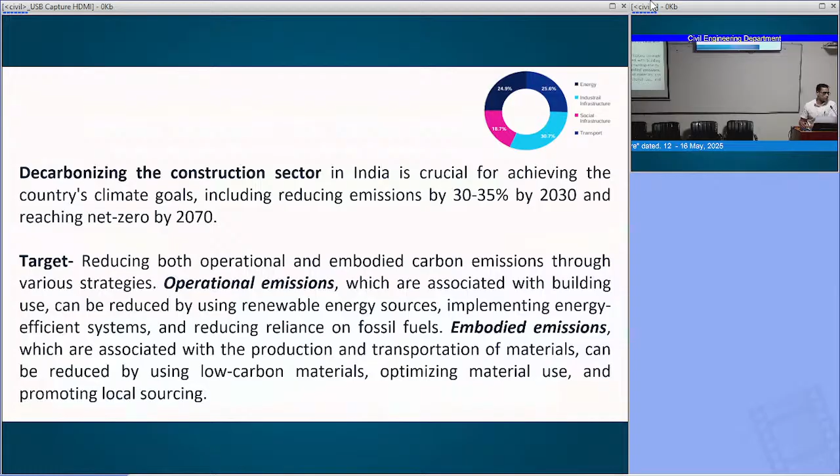I hope all of you are aware about NIRF ranking. In ranking now, this term is coming up in a bigger way, where you are going to get marks for that, and that is how probably we need to focus more on the operational emissions, how we can control it. Then at the end you come to the embodied emissions, which the earlier speaker also talked about, how much energy is required for manufacturing a particular product.

Now when you look at operational energy, I hope some of you are aware of what this current government is doing in India. Let us talk about how we can reduce the demand for energy, or control the demand for energy based on conventional sources. Primarily one option is obviously to go for renewable energy, and we know what kind of economic model this government is setting for all of us.

If it is at the domestic level, there are certain different norms; if it is at the industrial level, there are different norms. But primarily right now, if you want solar energy in your home, the government is giving some kind of incentives, subsidies exactly. So this is not something very different which we should only learn from developed nations; in our country too we have set some very good examples which can be put forward, and then we can really understand it.

Now again the question arises, because we are working on whole life cycle assessment: what is the end of life of a solar PV? And then at the end of the solar PV, where does that material go? If you have seen solar PV panels, there is an aluminum frame, then you have some material like silicon based material which primarily generates energy, and if it is getting stored, you are using some batteries as well.

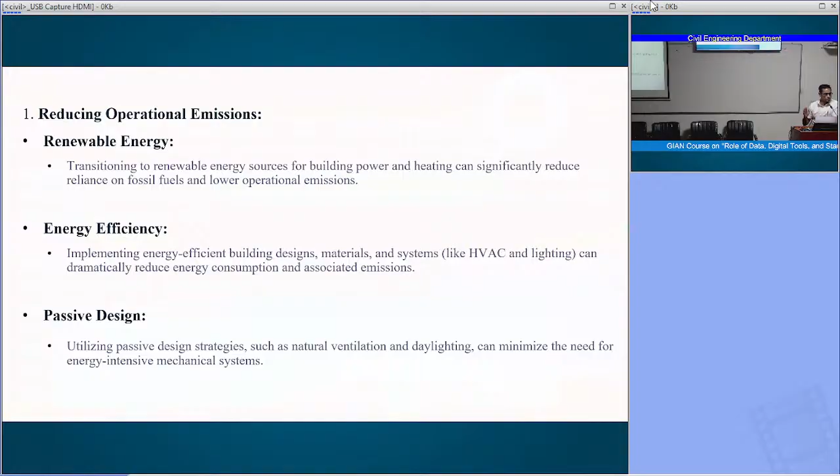Coming back to the second phase, which was asking about embodied emissions - in case of embodied energy, this is the area where my entire group and all of us are working together, which normally talks about low carbon materials.

I'll just simply read the basics where we talk about sustainable wood, where sir has also said in developed nations like the US, they use a lot of wood. Then you talk about utilization of recycled steel.

So normally the cut pieces which are removed from my side are normally sold or given back to the industries, and they do re-rolling of the steel, and that steel can be reused again on my side. Nowadays we are all hearing a lot about LC3, where you require less amount of energy for production of cement.

That is one of the areas where you talk about alternate cement formulations. We are working now, selling a concept, where we manufacture concrete with zero cement, zero sand, no water for curing, gaining 100% strength in 7 days. People are cracking their heads day in and day out in this domain, and we hope they will come up with their own philosophy. We are commercializing one such technology in the local region of Nagpur. This is how it goes for alternates of cement, which is primarily required for carbon footprint reduction.

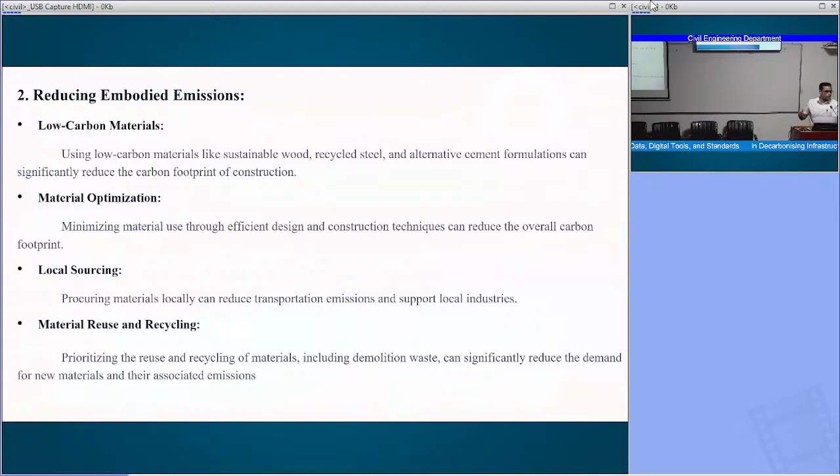This is what the Indian market needs. Before we go for the legal aspect, we need to have this particular angle before giving the final verdict stating that we can demolish a structure or not.

More on the policy terms, still in India, if you are involved in a larger construction, having ratings for my projects is still at a nascent stage. It is not mandatory, it is a voluntary approach. Some municipal authorities have made it a mandate, but there are very few examples. If you see any growing class 2 city, or talk about metro regions, there are only a few key players who are keen for this type of green certification, like star ratings and all.

And I'll show you some examples of how this benefits the end community who is executing. You can tell me, so many of you are on campuses, is there any structure which is rated as star rated? For your Hyderabad campus, what I know is, for NICMAR Hyderabad campus recently they got IGBC rating, and Pune also. Good.

So this is how it goes, where essentially we need to focus more on policy. What kind of support which I can get from the government, that can also be checked. And this is more important, where we need to work together, as Anil sir is also saying, at the end we need to come up with some document, if not now, maybe down the line two, three, four years or months, where all of you can give your inputs, either for material, energy or water. State what kind of policy formulations has to be there, that this particular clause is essentially required. That is how a policy document can come up for the builders.

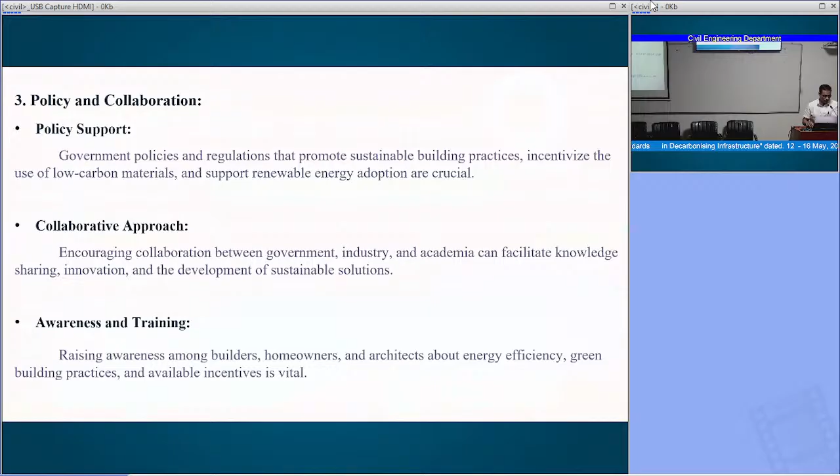This is more important, where you talk about the developing era. If we can focus more on technology and innovation, where everything can be controlled within my factory, and on site whatever we are doing, probably less intervention of any of those resources what we exploit or which do not have any benchmarking. So you have a lot of digital technologies.

I hope most cities now have metro, right? And in every metro you must have seen there are pillar numbers. Behind the pillar number, the story is inside that pillar, what it has, that is being recorded somewhere. That is how the story goes, and that is the whole idea of introducing BIM, where you are systematically putting up the data of a particular structure, what you are constructing for the community.

And then also there are better ways, what is being mentioned as prefabrication or volumetric or 3D printing and so on and so forth. Those are all the multiple areas where you try to focus on how these emerging technologies can help our particular entire construction industry where you control your emissions.

Data driven approach, we need to generate the data for our country. That is again most important. We do not have data. Often we just try to fetch something from the net, and whatever is available we just try to quote that such and such researcher has given, but there are no standards. And then this baseline data generation itself is going to be challenging.

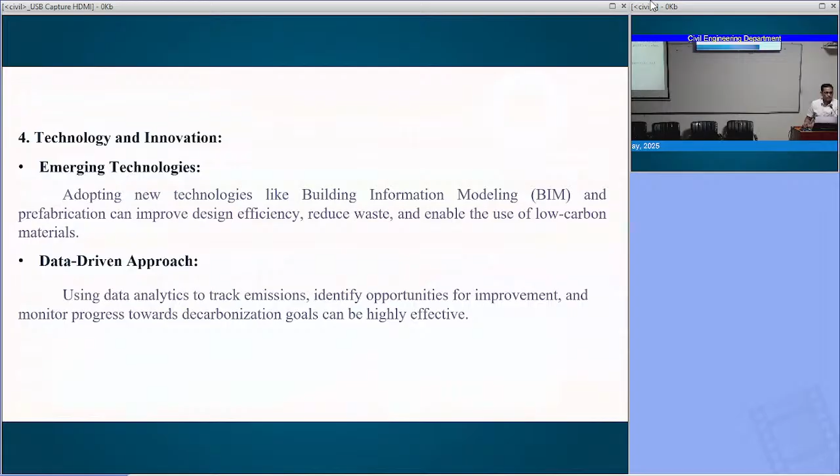For that probably we can take help of our students who can go to the industry, and industries are always reluctant to give the real life data. That is again a challenging part. We have been asking these kind of questions to a lot of industry people, but that's the real fact, where we need to get the real life data in terms of the Indian market. So that is also one primary area, you can say.

However, there are two more additional players in India which primarily focus on sustainability or efficiency. You have the Global Business and Sustainability Initiative, working on decarbonizing sectors like residential. You can browse a bit and get more information from these kinds of agencies.

You also have the Alliance for an Energy Efficient Economy, where they look at the decarbonization roadmap for developing countries like India, and right now they are focusing only on the cement sector. If we say let's stop using cement, it's still weird in the local market.

If I remember correctly, 5 or 10 years back there were guidelines that the production of clay bricks should be stopped immediately, and the Pollution Control Board gave this mandate. However, we still have a very good number of manufacturers existing in the market.

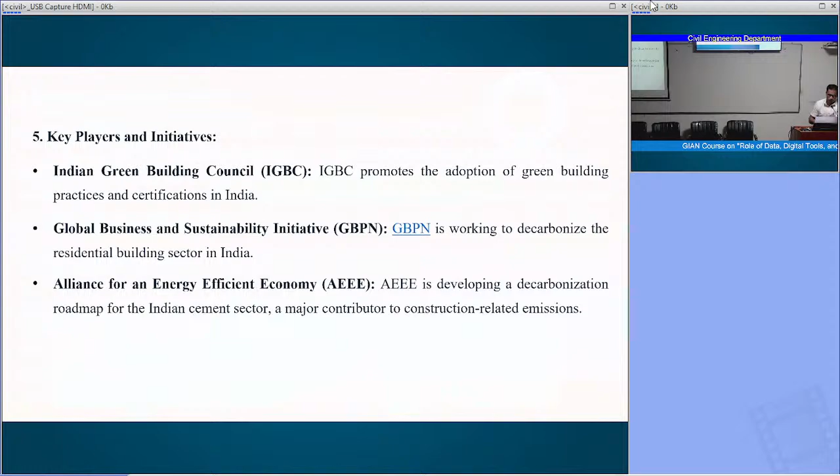So we need to understand this, and probably this is one of the domains where they are focusing more on the cement sector. I should not say much about green building because this is not a new term, it's almost 2 decades old in the Indian market.

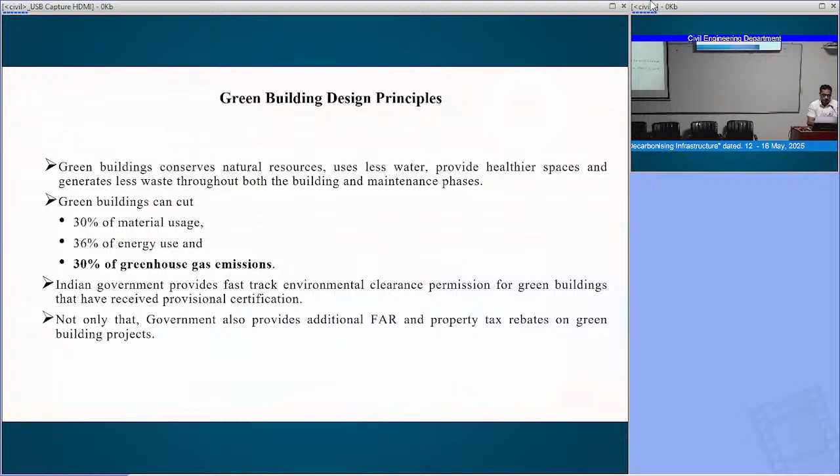But here the goal is about GHG emissions, and as per IGBC standards, if we apply green building design principles, probably you can save at least 30% of your emissions. Now this is how it goes - there are standards, and we need to focus on what kind of benefits or incentives exist.

I spoke earlier about educational institutes. Now let us talk about the private key players for different regions. I have showcased them here - I've Googled a bit, and these are all Indian markets.

So in India, it's not like the government is not active - we do have policies. The only thing is we need to apply it at a larger scale. There are very few examples available in the market currently, in states like Punjab, Rajasthan, West Bengal, UP, Maharashtra, Himachal, and Jharkhand.

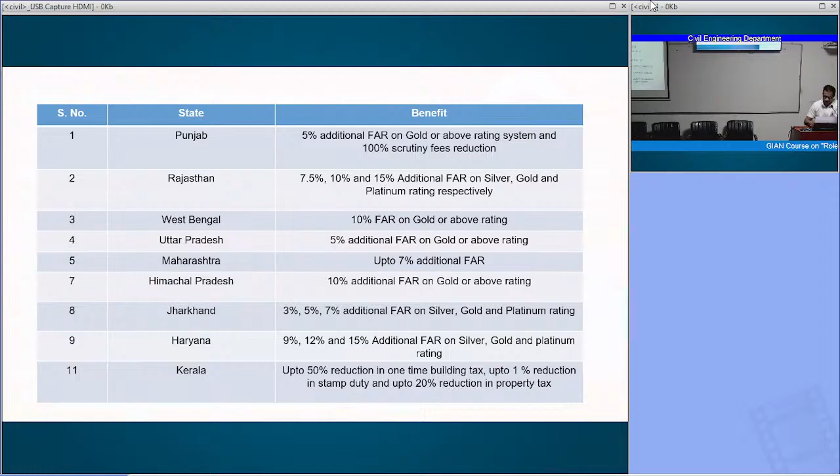Right now, as we are in Maharashtra, you can see up to 7% additional FAR allowed, provided that particular project is one of the best certified or star-rated products from the green building perspective. Let's do one small comparison of where we stand.

I'm not sure if it's visible, but the first 2 or 3 columns talk only about India, India, and India. And now the net zero guidelines exist, which work on the philosophy of decarbonization.

Earlier it was only about efficiency - that's how the jargon evolved. First, when we started working, it was about designing or developing something energy efficient. Then sustainability came into picture. Now we are talking about decarbonization or net zero.

The story remains the same - the holistic idea is that over the last 2 decades, the Government of India has really been trying to push this mission to a larger extent.

And if we see IGBC and GRIHA - GRIHA is still relatively silent, and it's offered for government institutions, with clear intentions. There are certain standards applicable for both existing and newer constructions. So that is how IGBC net zero guidelines work.

At the top, it focuses more on waste rating, energy rating, and water rating. So if we ask any contractors, do you generate waste on site, normally the answer is no. They say, sir, 100% of whatever construction waste or leftover material is there, we use it for backfilling - which is not the real life case.

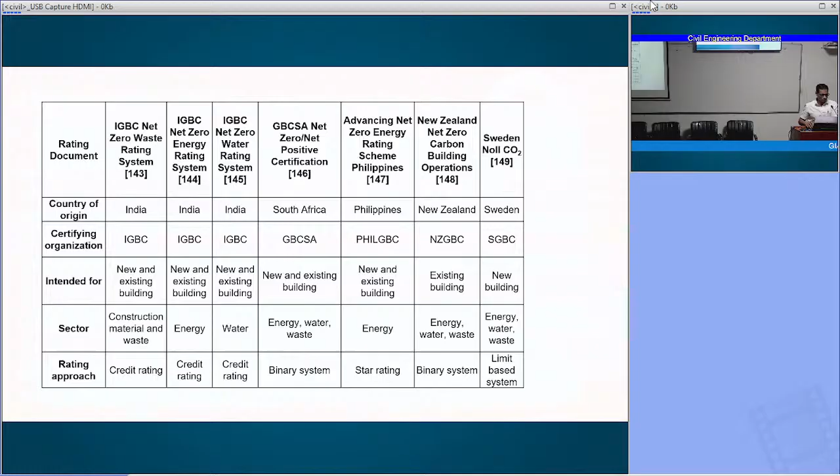This is how they are again talking about net zero and Noll CO2, something like that. Some aspects of the guidelines are by and large repeating, I'll just simply read the bold letters. It talks about energy efficiency, conservation, energy efficient equipment application, then renewable energy harnessing, then you have carbon offsets, which you need to assess using the amount of energy you have, and then you also focus on GHG emission.

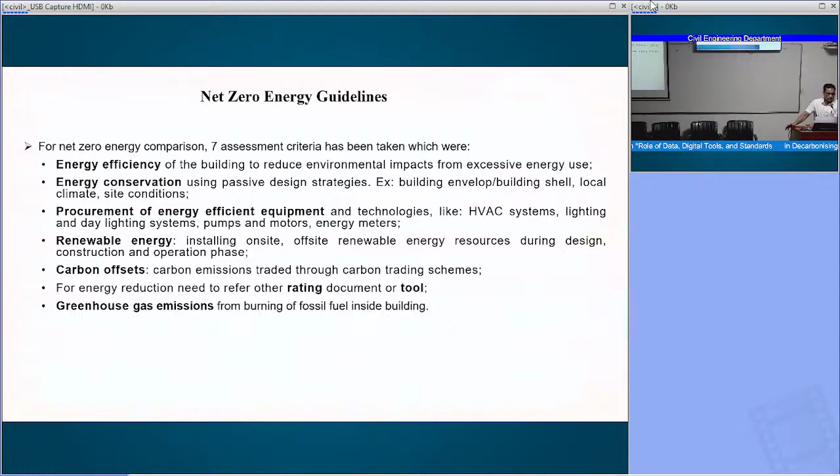We are all using OpenLCA as one of the tools, and a demo will be given by one of the experts, I think day after tomorrow, so the third day. There you will get to know how to input data into the tool, and OpenLCA is free of cost, so any one of you can use it for any particular product, whether for research or a case you are designing or working with.

More on the net zero energy part. Wherever check marks are there, it primarily focuses on the fact that you need energy efficiency, energy conservation, and good procurement control. I do not know how you procure your material requirements, but in government institutions we have a mandate where we go for e-procurement, a digital way of doing business, where you understand that your procurement is efficient and you compare all products on a common line.

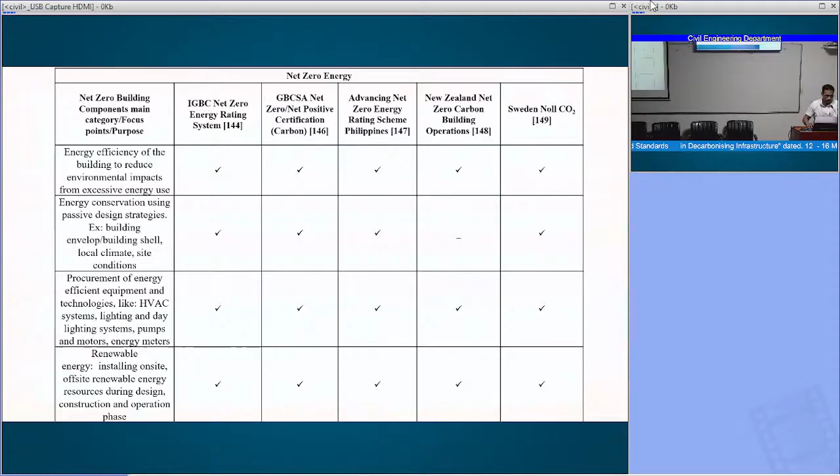And about renewable energy, as we already discussed, they are all available. Also, in most cases in the Indian system, carbon offsetting is still silent. For energy reduction there are no standard guidelines. These are areas where as a researcher our goal is always, can I do something into this, or some of my predecessors or successors can connect and develop good guidelines for them. And GHG emissions are still silent in Indian guidelines as well.

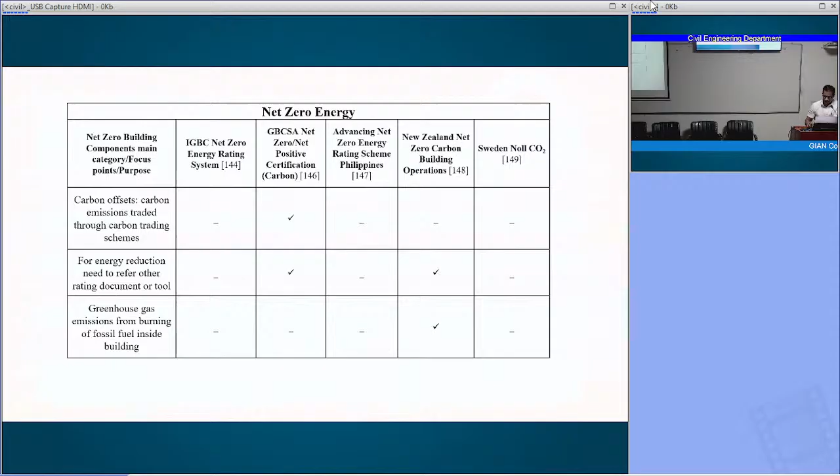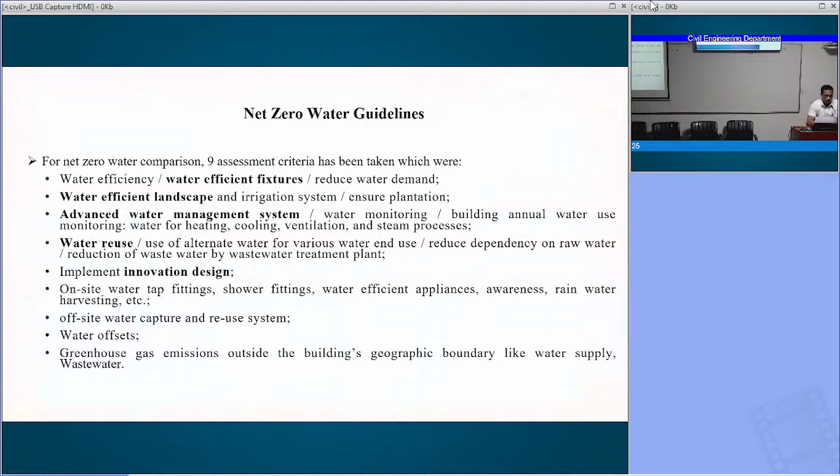Coming back to water efficient guidelines, you talk about water efficient fixtures, water efficient landscaping, and advanced water management systems, using a lot of sensors for agriculture purposes. I hope you know drip irrigation - there are certain sensors which sense the moisture of the soil and accordingly release the amount of water required. This is how the story goes with smart or efficient water usage, and innovative designs are always there for specific applications.

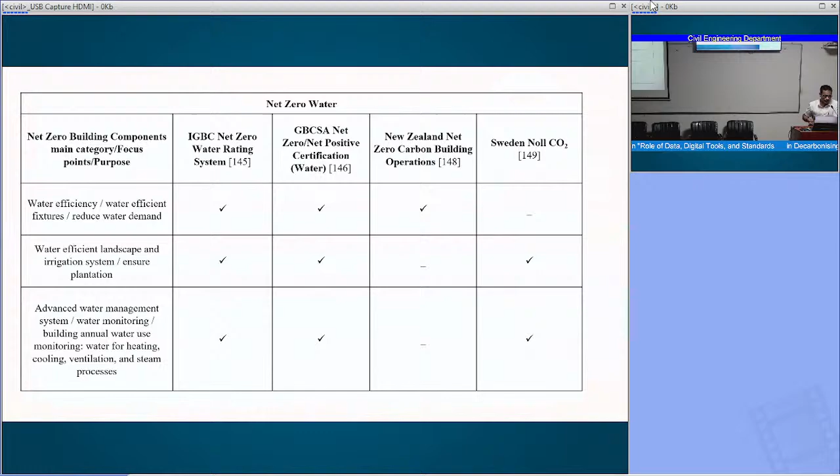Now again, if I focus only on the first or second column which talks about IGBC net zero guidelines, water efficiency in case of landscaping, fixtures, as well as advanced water management systems are all comparable in case of IGBC. You can always download these guidelines, they are freely available in the Indian market, and you can give them to any of your teammates.

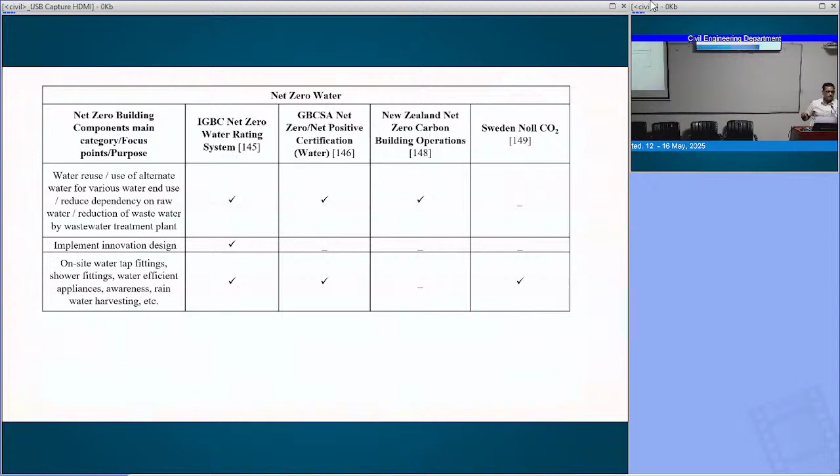This is more important as far as waste is concerned. If I ask you per day how much waste an individual generates, the question remains, how many kilograms of waste per day do I generate? Maybe because of food, when I eat say 250 grams of vegetable, how much waste is subsequently there? For cleaning of those vegetables, how much water am I spilling?

So something like that, it talks more about waste or net zero waste guidelines, where it talks about modularity and recyclability for each and every product, right? Then it also focuses on procurement of green or low climate impact materials. So that is how we are trying to reduce the usage of plastic.

I hope earlier you must have seen most events where people used to have plastic bottles. Now if you see, you come back to VNIT, plastic bottles are not allowed. Not allowed means we are not giving them. So if that is owned by you, it's fine. That's why water is kept outside. Even if we are meeting our director, the scenario remains the same. If you are thirsty, you go out, have a glass of water and come back. But there is no plastic waste.

So that is what we talk about, smarter procurement or the simple way of reducing waste. Then you talk about reducing waste generation, as we are not using it, obviously generation is getting controlled. And then reuse of waste materials.

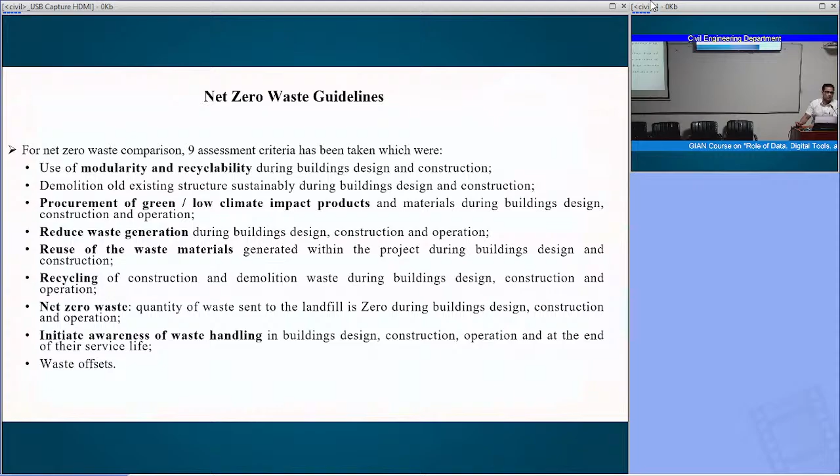Then initiatives about awareness of waste handling are most important. A lot of campaigns still keep moving in our country around wet waste and dry waste. Then there's a third waste coming up, known as electronic waste, one of the fastest growing industries in our country, where nobody likes to use a mobile phone for more than 1 or 2 years. Technology keeps shifting so fast. So where does it get dumped? Can I use it for some application in the construction industry? That is again the important part.

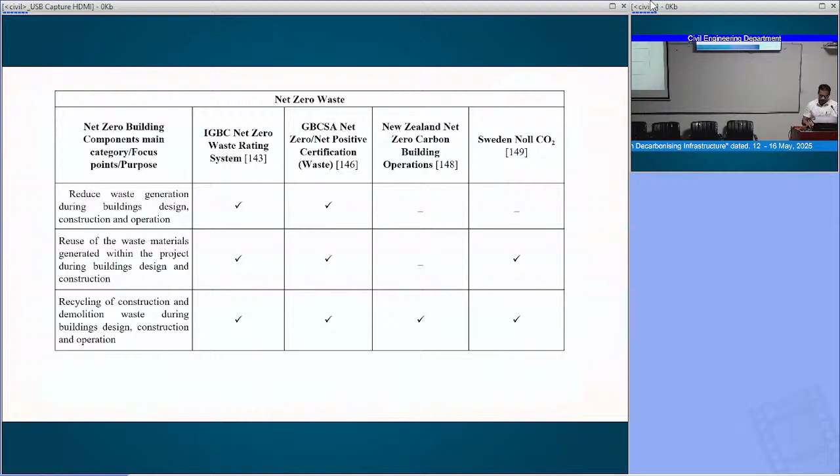In case of IGBC guidelines, the essential mandates are very well defined, and you can always compare whether all these points are defined in IGBC net zero guidelines. If so, try to pick them for your particular site or project and try to implement a holistic case from the technology intervention standpoint, so that we can give the solution in terms of a net zero waste rating system.

Coming back to the Indian story I shared earlier, there are 2 or 3 agencies like IGBC. If I just googled a bit - Invest India, American Council for an Energy-Efficient Economy, then RICS where sir belongs, then CSE India, Autodesk, World Economic Forum, and GBPN. There are a lot of examples like this, and everywhere you can see climate change, decarbonization, built environment - decarbonization, decarbonization. So it's not only 1 or 2 agencies focusing right now, but a lot of research is going on in the core domain of decarbonization.

You only need to reach out if you are looking to get connected with the right agencies in India who are actively working on decarbonization, including KPMG, which is one of the organizations that has a lot of inputs for decarbonizing infrastructure or buildings they are focusing on.

Coming back, what does IGBC focus on? There are, as I gave you, 4 examples. Either you talk about energy, water, waste, or net zero carbon rating system itself - there are separate guidelines. You need to pick which feature of these IGBC areas you want to touch upon for a particular project, and then start investigating into this domain, wherein just try to see the scale of 100 remains the same.

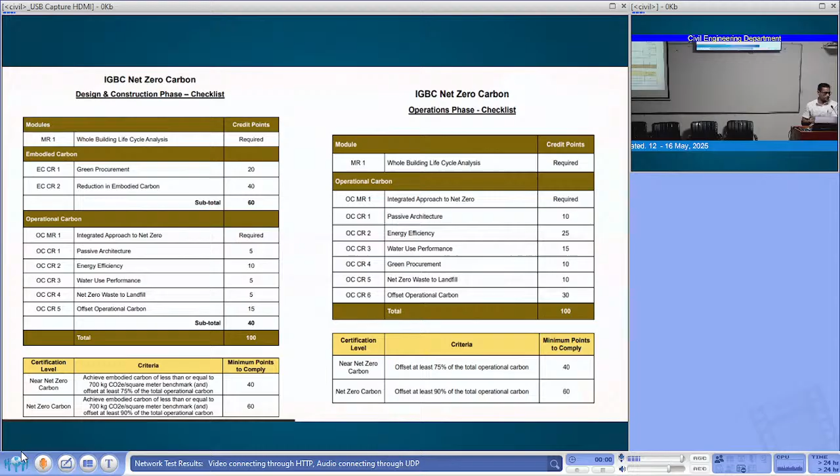Try to see or touch any particular building that exists since the last 10 years. Look at their energy bills or water footprint, and then give them a solution to reduce it. I'm talking at a larger scale, hitting up industries or township projects where a lot of inputs are required, so they can improvise, because these guidelines came up much later in existence. As I gave the earlier example, African based organizations talk about net positive - can I sell my resource to the other community? That is net positive, be it energy, water, or material, which is the challenging part. That is what we have to focus on in either design or operational phase.

Hope sir must have shown these SDG guidelines. Now as a civil engineer, try to assess which of these 17 goals are equivalent to the civil engineering fraternity. At the end you should say I can correlate and hit essentially all of them.

So, no poverty - I say that I have to use local material. Local material or local business means I need to bring something new into the market, so I am bringing up employability. So obviously I am reducing poverty, right? That is how it will go step by step. How do you convince yourself, right?

There are guidelines we call THE guidelines. Some of you must know the higher education academic guidelines are available, again set by developed nations. We do use these, where each and every guideline is briefly described.

Zero hunger - the moment you say I am reducing poverty, obviously hunger also goes down. Good health and well-being - if you provide a better built environment, obviously the well-being of the people within it will always be on a higher note. Quality education is essentially required, where most educational institutes play a major role. Gender equality is again pitched as a social sustainability part.

Coming to the sixth part, we primarily focus on clean water and sanitation. For concrete experts, we often ask: do you have standard guidelines on what quality of water you should use? People have done a lot of research treating wastewater and doing mix design to show the product is much better. There are very limited guidelines about water in IS 456, however you can try to prescribe the best quality of water possible. One example: we did magnetization of water long back and used that water for concrete mix design, and it gave very good results in enhancing compressive strength performance.

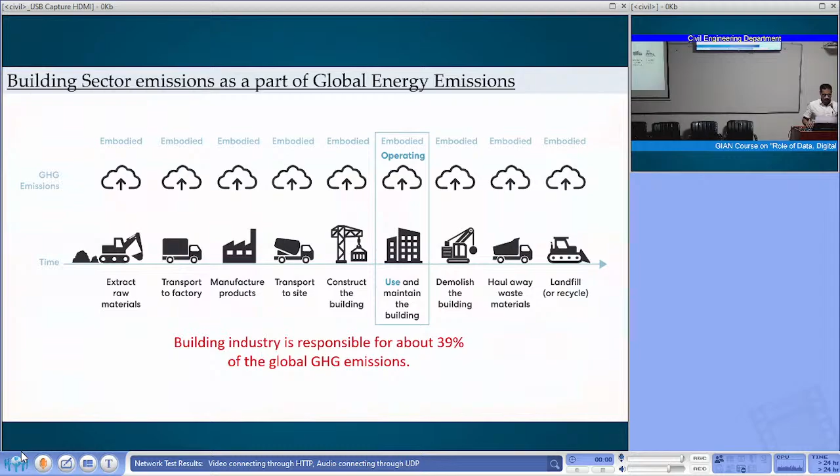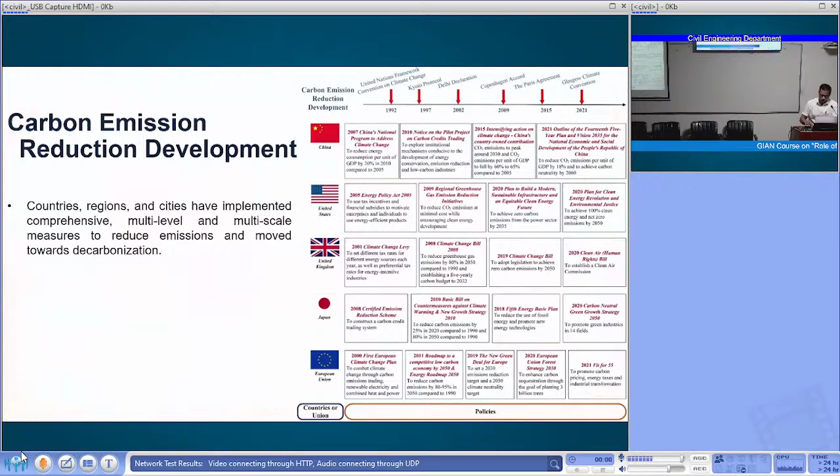Now coming back to carbon emission reduction development, I was surprised when I started exploring where we have guidelines. First, we do not have carbon emission data itself, so if carbon emission itself is not there, reduction strategy is again a question mark. China is one of the leading countries with a lot of input on carbon reduction emissions, then US, UK, Japan, and the European Union. These are some of the countries with a lot of input on carbon emission reduction strategies or development plans.

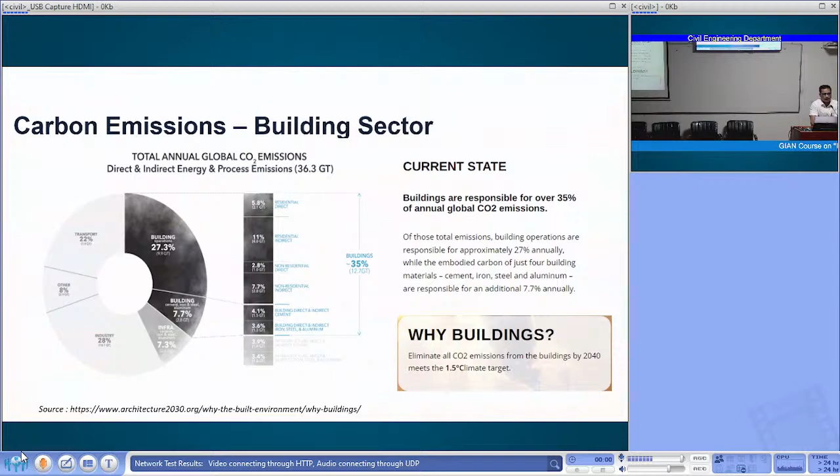Coming back to the building sector, carbon emissions - sir has also spoken a lot about this - but here we talk mainly about 30% of the construction or energy that we normally generate being exploited in our country, and this is the matter of concern: can I reduce the demand? Buildings themselves account for around 35% of the energy we try to generate. This is a segregation - we call it sensitivity analysis - of which industry we need to target from the perspective of emission.

So almost 80 to 90% of CO2 emission is accounted for by raw materials - the production of raw material. That is how the research started, for alternate raw materials probably.

Then you talk about non-metallic materials. I have been giving this example: the wooden industry has been totally replaced by the aluminum industry, and we all agree - all door frames, window frames which were earlier wooden, have been shifted to the aluminum industry, or to an extent the concrete industry.

So when you talk about concrete, almost 78% of CO2 emissions are accounted for there. Then you have steel and cement mortar, and mostly they are all in line with production as well as transportation.

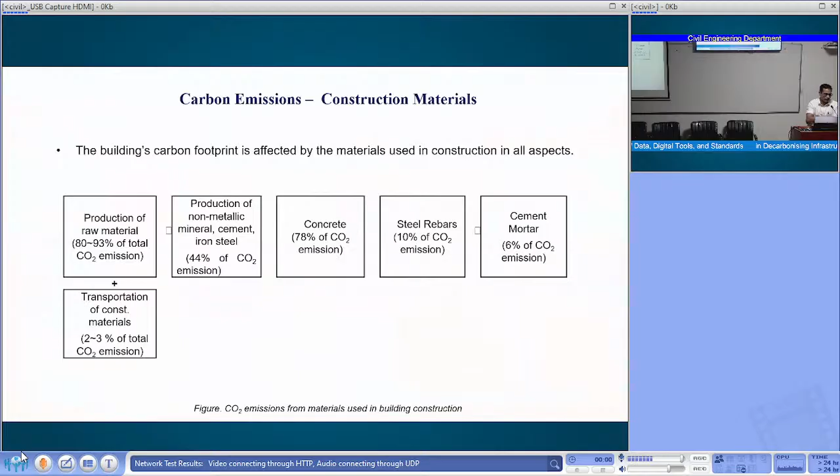So what is the best way of designing an alternate product? We try to avoid the material which accounts for emission, which is very rare. Even if I buy raw material from any industry, I need to transport it, and then process it a bit, including crushing those materials.

Then we have to shift to alternate materials. As I said, it cannot be only one material - there has to be multiple products, and how much of that product you can use on site is again important. You have to improve the performance of the end products. This is all a goal for the next 20 to 30 years.

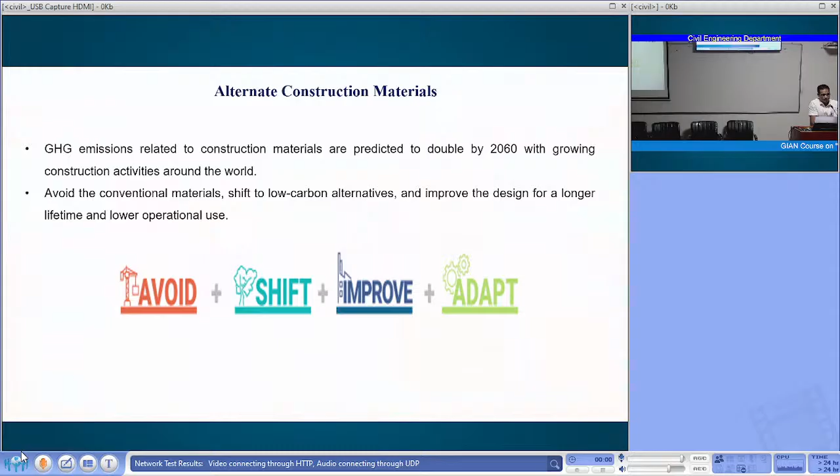And the end output is adapt - adoption to a particular change in society. Maybe in childhood we never saw fly ash bricks, but now everyone knows what a fly ash brick is. Tomorrow you will start getting, or our next generation will get, products with zero cement, because earlier lime used to be used. Now lime-based products, nobody recommends - most commercial industries I'm talking about. So adoption will come. These are some examples.

If time permits, anytime you can drop into our labs, all the scholars associated here can show you the different products we are coming up with.

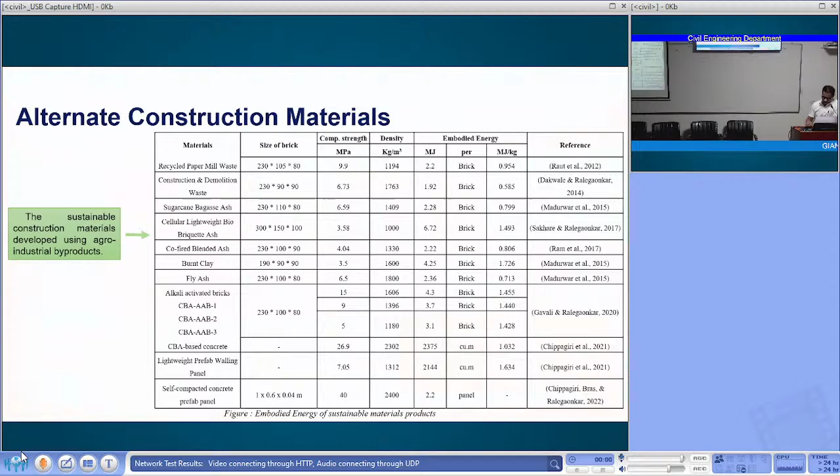In case of the whole life cycle approach, where you talk about better designs - better design wherein all the designers, your MEP consultant, your structural designer, mechanical, electrical, and an architect, everybody is associated - where you talk about a circular approach. In case of circular, you talk about reduce, recycle and reuse. Then you also talk about LCA analysis.

So LCA analyst, there is demand now in the market. If you know something about a software or tool, it will start helping you, because emission data will keep changing from location to location or company to company, but you only need to do inventory, just put the data and come up with the end results.

Durability is again a major part, where Dr. Mangesh is working very actively, where we try to focus more on how to reduce the maintenance cost. So obviously it's a better approach, where you try to reduce the maintenance requirement of a structure, or you are creating a durable structure so there will be lesser consumption of materials over the lifespan.

And then you also talk about resource efficiency - how much of the conventional resources you have controlled.

When you come back to the second pillar, it talks about use of alternate building materials. This is now one of the bigger areas where you need to figure out: do I have a substitute for a binder? Do I have a substitute for fine aggregate, or coarse aggregate? Do I have a substitute for reinforcement, and so on.